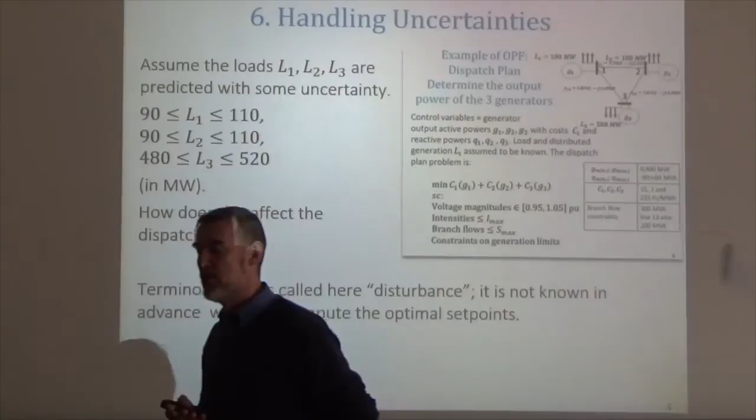For a very, very large grid, for example, the transmission network of France, the uncertainty about the loads is very small because we have a huge system and the laws of large numbers make the individual variations more or less cancel out, and the uncertainty of loads comes from human behavior. So if you're able to forecast that there is a hockey match on Saturday evening, that there is nice weather on Sunday, you can know more or less what people will do. So large companies that run large grids do this using sophisticated machine learning and forecasting techniques, and they forecast the loads with an accuracy for very large countries at the aggregate level of order of 1%.

Of course, if you do that at a smaller scale, if you're doing voltage control on the EPFL campus, for example, which we're not doing because the EPFL grid, like everything at EPFL, is over-dimensioned, so there are no voltage problems. But in other parts of Switzerland, there may be voltage problems if the grid has been built over time by adding new settlements, new buildings, and then trying to extend the grid rather than building a new transformer or pulling new cables. Then you might have voltage problems, and in that case you need to do a forecast at a much smaller time scale, smaller space scale. In that case, you will have uncertainties that may be up to 10–20%.

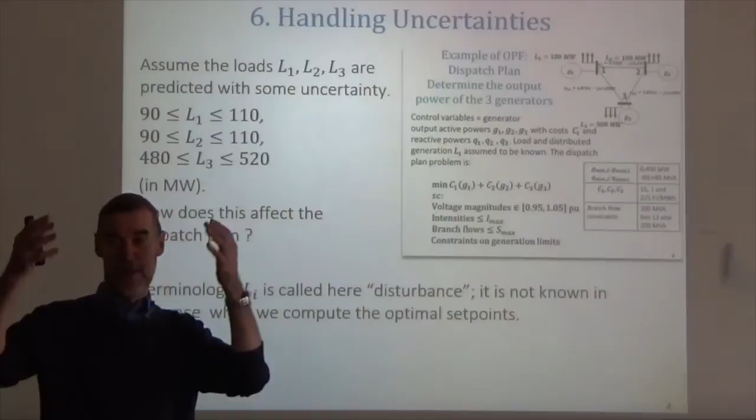From the grid viewpoint, they are not fed to a separate grid that would be called the grid of generators. That's not the way it is. They are just fed to the same transformers. So we speak here of the net load. So the net load is the true load minus the production. And in some cases, the net load might be negative, which means a load might be, in fact, generation. When we add the net loads, then we have much more variability.

Solar PVs in particular are easy to forecast, roughly speaking, if we know the weather forecast. However, they're affected by clouds. So if there are cloudy days, like today, for example, the production can go down by 30 to 60% when clouds pass, and it's very difficult to forecast clouds exactly on a given neighborhood. So to make a long story short, the load forecast accuracy is usually from very accurate to 10-20%.

There might be other reasons for randomness. For example, you might want to do something that assumes that you might have a failure of at least one device. We don't do that on this very small grid, but this is also done in larger grids, where if you have n generators, you might do a plan assuming 1 out of the n generators, or in general k out of the n generators, are in a random state, which is on or off. So you may want to have the system operational, assuming all this uncertainty.

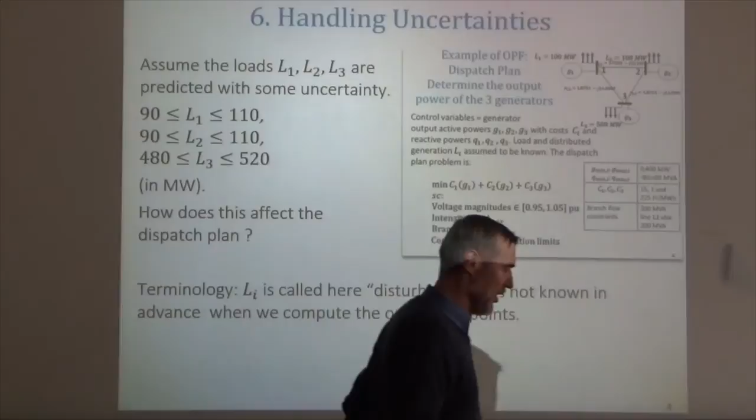Here, what we will discuss more precisely is when we have continuous uncertainty. That means inequalities, like here. How does this affect the dispatch plan? From a control theory viewpoint, we are in front of what is called a stochastic optimization problem, or an optimization problem with uncertainty, or a robust optimization problem. Those are all generic terms that may mean specifically different things. We'll talk about it when we see the specific instances of the problems.

But the terminology that is usually accepted is to say that the random thing is called a disturbance. In other fields of mathematics, we would call it a random variable. Here, it's not always modeled using stochastic frameworks and distributions, sometimes just with inequalities. So we invented a generic term that is called a disturbance.

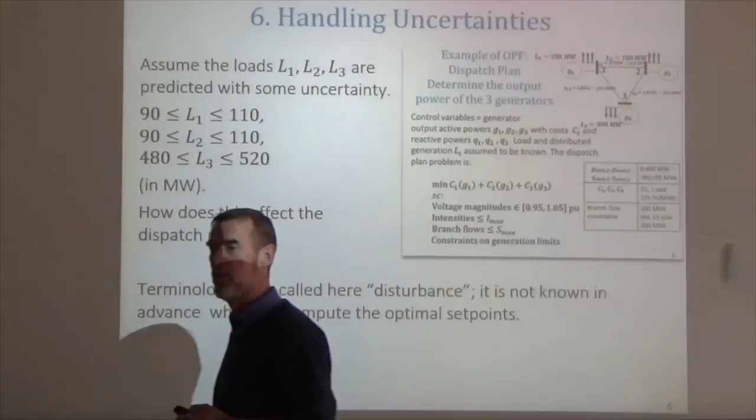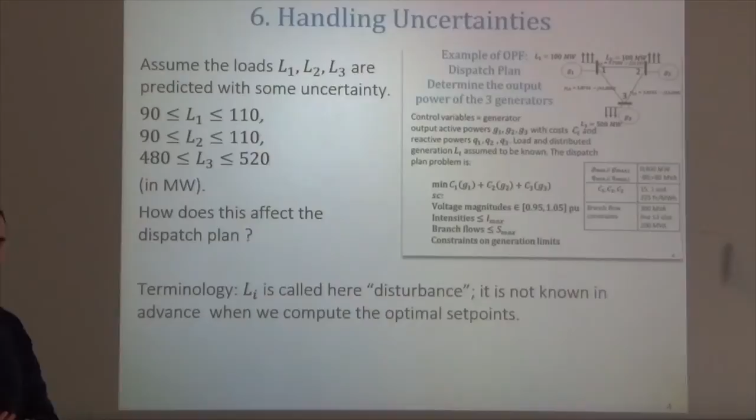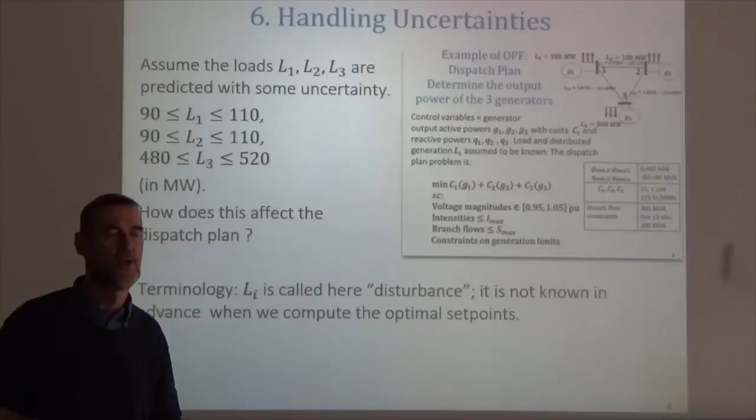So from a control and optimization viewpoint, we're in front of an optimization problem where we have a state. We have a state equation, which is the equations of the grid. We have control. Those are the things we have to decide upon. And there is disturbance. So we can view it also as a game where we are in front of a big machine or a big system. We have to tune some knobs to find the values of some parameters. And then an adversary, nature, randomness of users, will play something called a disturbance. And we have to find control that will work well under all conditions of the disturbance, or practically all.

So if we look in detail at this problem here, we have to choose the set points of the two generators, G2 and G3. As we said, the first one is the slack bus, so there will be instantaneous power balance in the entire system, so G1 will adapt. And let's assume the cost we will pay is the cost of the two generators, G2 and G3. The slack bus also has a cost, we assume. And we'll have to pay for this cost. Now, the new thing is that this cost is unknown in advance. So we have to buy something that we don't know exactly the cost, right? So it's like if you decide to go somewhere with your car, you will have to budget a certain amount of money for the gasoline. You will not know exactly how much you will pay, but you will have to pay for that.

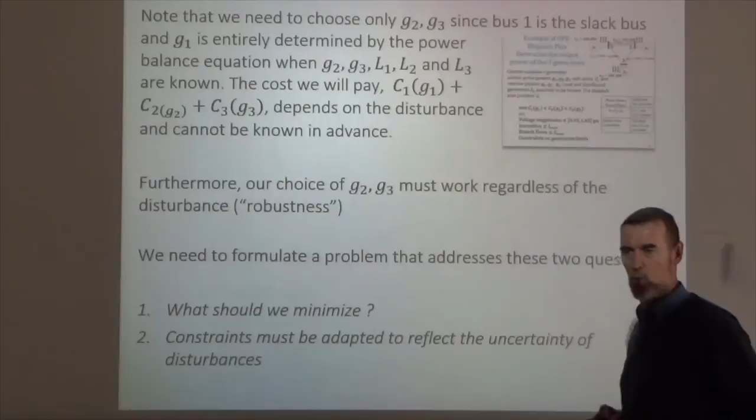Right? Furthermore, the choice of the set points of the control must work for all values of the disturbance. What does that mean? Well, we have limits here, limitations on the power flows that can go on the grid. So I cannot use any fixed value here and hope that it will work in front of all uncertainties. It may be that if the L load here is very variable, we are forced to have a power flow that is very large on this line, and it might make the problem unfeasible. So when we have disturbances that have very large variability, very large range, we will be confronted with this problem. We will see that we must choose set points, control actions, values of the controls that work for all values of the disturbance, and sometimes it may not be possible. So some robust control problem might be infeasible. We'll see some cases of that.

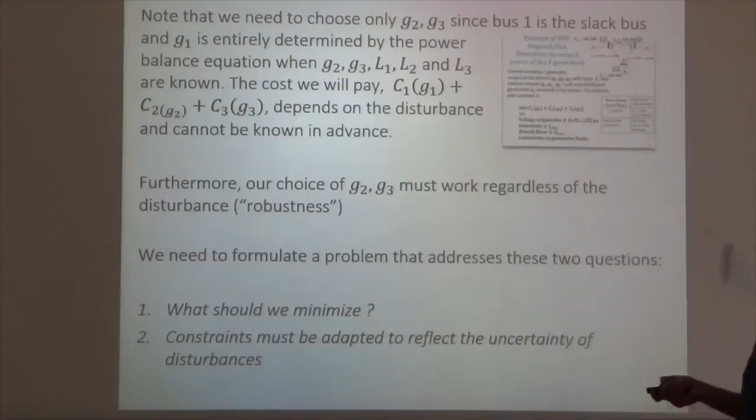So we see here that there's a separation in the variable part of the load that affects two parts of the problem we had formulated. The first part is how do we formulate the cost that we want to minimize, given that the cost is now something that is unknown. And the second thing is how do we formulate the constraints, the fact that the constraints must work in all cases. You will see when we do that in practice that the most difficult part is to adapt the constraints. Finding controls that work for all constraints, that is the part that is the most difficult in practice.

A classical way to formulate such a problem is to cast it as what is called a stochastic optimization problem. Stochastic optimization assumes that the disturbance is drawn as a random variable. So we have to choose some control parameter, I call them generically U. Our U in the case before was G2, G3. Nature, or our adversary, or human beings will choose some disturbance that we assume to be known in a specified set. And the system state is given by the plant equation that we assume we know.

In the case of a grid, we know exactly with the admittance matrix formulation, we know this equation. So the state will be a function of what we have decided and of the disturbance. And one of the major constraints we have is that the state must be feasible regardless of the disturbance, and we will pay a cost that depends on our action and the state here. So that's a fairly generic formulation here.

In the framework of stochastic optimization, for the thing we minimize or optimize, we take the expected cost. Expected cost means we assume that we can say something about the distribution of the disturbance, not only its bounds, but also something about the distribution. If we can say something about it, we can compute the expected value of the cost of u and x when x results from f of u and d. So the random thing now is d.

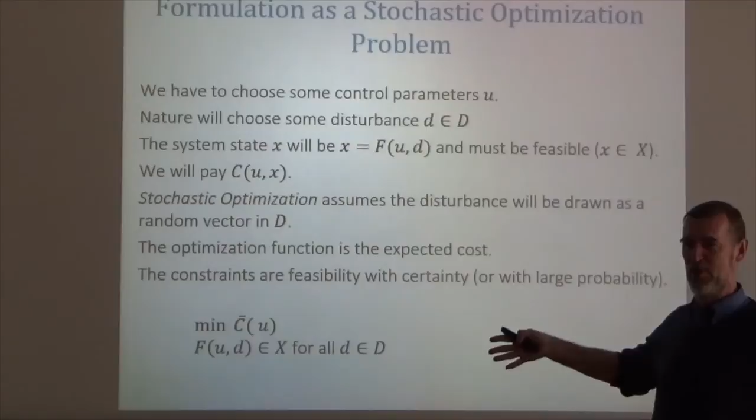So very often, what we try to do is to find a subset of D where with very large probability, 99% for example, the constraint will be satisfied. Which means we accept the fact that with some probability we fail. In a grid, the probability of failure is non-zero and is accepted. We accept as okay behavior if it fails 2 hours per year, which corresponds to a probability of failure that depends on the time scale on which you are operating. If you're doing this for the next day, you should have a probability of failure for the next day such that when we accumulate those probabilities over an entire year, we get maximum 2 hours per year, which is 99.99% over the year. So the probability of failing over a single day must be much, much smaller. This is the most general form of stochastic optimization, where we have also some probability in the constraints here.

So let's apply this framework to our example. I use here the DC approximation to simplify. We can of course do that with any convexification we have of our problem, but there are many technical problems. The more sophisticated the linearization is, the more complicated the equations will be, but the framework is always the same. So I take the simplest framework here. Those are the equations we have of the grid, so the state equation, when we replace the AC equations by the DC approximation.

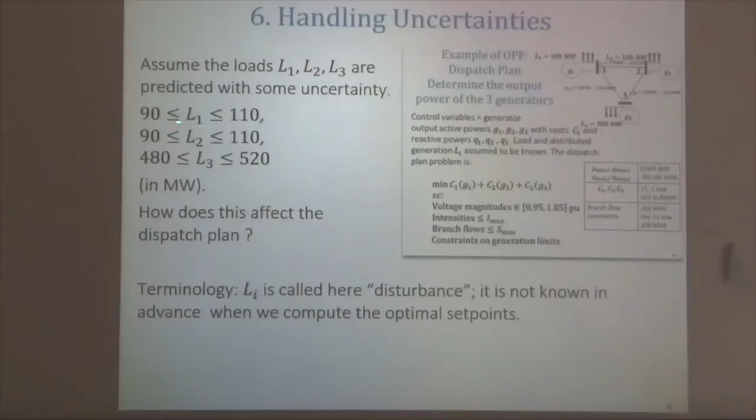Then what we want to minimize is the cost of the set points G1, G2, G3. Here I have separated an equation for the cost of G1. This is the power balance equation with the DC approximation. And here I put a bar over L1, L2, L3 to express that the bar is the expected value of L1, L2, L3. Here I'm assuming that L1, L2, and L3 are between those bounds here. And I'm making some additional assumption. I'm assuming also that the expected value of L1 is the middle, which means it follows some distribution which is symmetric, for example uniform, but any distribution that has the property that the mean is at the center would also be okay. So I assume here L1 bar is 100, for example.

Since the cost here is also linear, the expected value of the cost is the cost of the mean. So the cost of G1 in expected value will be G1 bar. Then G2 and G3 are our control variables, so their expected value with respect to the disturbance is G2 and G3. So this is what the C bar function becomes. Then we have all those equalities for the true and random values.

Those are the grid equations that we had before. When we translate them into the DC approximations, we find those inequalities of the angles that correspond to the power flow limitations on the lines. And we also have the inequalities on the power injections at the different generators. So this is the same as before.

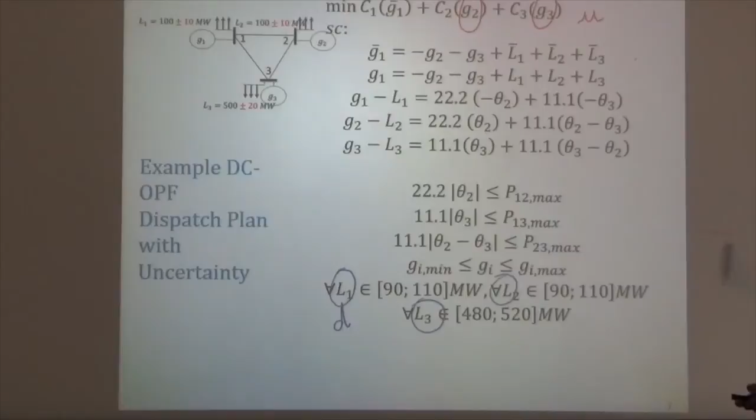And what is new, in addition to the cost, is that here we find the condition that those inequalities must be true, particularly those ones, for any value of the disturbance within the specified bounds. So this quantifier "for all L1" is the new and annoying thing. That's the thing we need to get rid of, and we'll see techniques to do this. Okay, this I have explained already.

So the next step to solve this optimization problem is to make it appear in the framework I gave before, where we have only a control and a disturbance. So I need to remove the state from the equations. If you remember the formalism, we have a state equation, which is x as a function of the control and the disturbance. And at the end, we want to say that the control is feasible for any value of the disturbance.

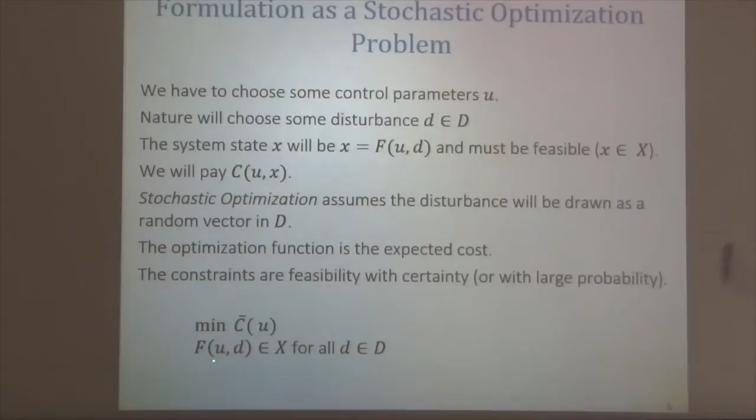So this is a constraint on U only, on the control. There's the letter D, but since it is for all D, the result is a property of U. So here I have eliminated X. That's what we will now do for this example. So the X is the theta here. Theta and G1. G2, G3 are the control. G1 is the state that results from the control and the load. Those are given by those equations here.

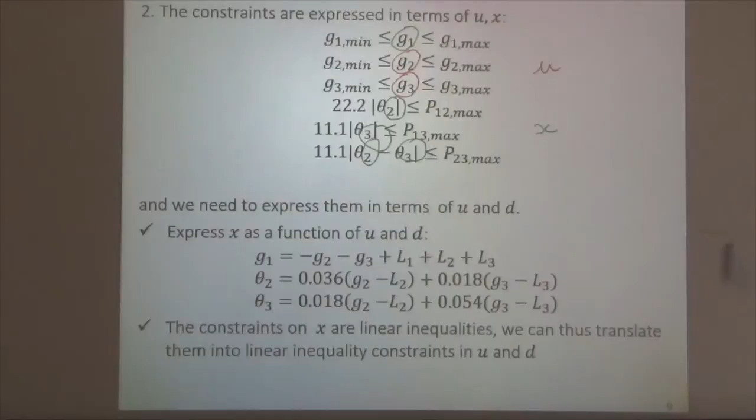So if I play G2 and G3, and if nature plays L1, L2, L3, we have from the DC approximation equalities, I can reconstruct G1, theta 2, and theta 3. Since those are all linear, of course, we've linearized everything, they're all linear in the control and in the disturbance, then the inequalities I have here can be translated into linear inequalities in the disturbance and the control. And if we do this, this is what we find. We find the control G2, G3, and the disturbance. And when we eliminate all the thetas and G1, we find those 4 lines of inequalities. That gives 8 inequalities here, plus those 4 inequalities on the controls G2, G3. So those are the constraints of the problem.

So if we go back, of course, if we look at this, we are too close to the details. We need to abstract it a bit to solve it. So if I abstract it, I see that I have a problem of the kind: minimize some function of the control u, because I've taken the expected value. C bar happens to be linear, but here the focus is not so much on whether it's linear or not. Subject to constraints. Now the constraints are all linear inequalities. We have, for example, here, G2, G3, L1, L2, L3 less than something, so that is one inequality, and another one, so I have 2 inequalities here that are linear in the control G2, G3, and the disturbance here.

So in general, I can write capital J linear inequalities that have the generic form for a linear inequality. It's linear in U and D, so I call A and B the coefficients that are in front of U and D. So the index J is for the jth line of inequalities, and the transpose is because this is a line of coefficients here. So each of those corresponds to all of those inequalities, and they have to be true for all values of the disturbances that are themselves defined by inequalities. So the disturbance is L, so those are the constraints on the disturbances, and we have here how many inequalities for the disturbances?

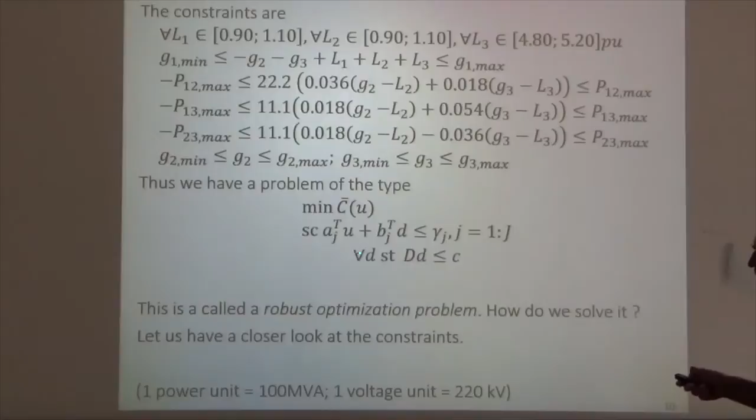It's called robust because there is the for all D here. So the robust means the disturbance is assumed to take values specified by some bounds. So the problem now that we will solve is how to solve it generically, once for all the problems of this type here. So we have a problem where we minimize a function of the control, where the control and the disturbance are subject to linear inequalities that are fairly simple here. The linear inequalities separate the control and the disturbance. And the disturbance themselves are also subject to linear inequalities here. So the problem is how to get rid, we will see that it's possible to get rid of the disturbance, which is annoying because of the for all sign here.

And the key step is to understand how to do it formally, in particular, how to get rid of the for all step here. Here I'm proposing 2 methods. I'd like to ask you to tell me which one you think is correct, if any. And the majority says C, which is correct.

But the important thing is, in fact, to understand the method that leads to this conclusion, because that's the method that we use in general for all robust optimization problem of this specific form. The key argument is that we had something that says this is less than a number, this inequality is true for all value of the parameter D1 that itself satisfies a constraint. Then the key step here is to say that this is equivalent to saying that it's less than the minimum. So saying that an expression is less than a function of d1 for all value of d1 is the same as saying that the expression is less than the minimum. Strictly speaking, it's the infimum, but here we will not do the distinction between the two.

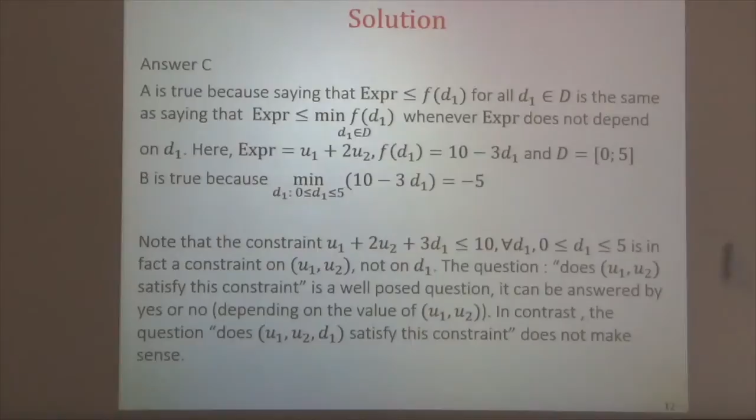Then the second step simply is true because now we have an optimization problem to solve, an auxiliary optimization problem. And this one is easy to solve because it's single dimensional. Anything single dimensional is usually simple. The minimum of this, that's a decreasing function of d1. So the minimum is obtained when d1 is larger, which is 5, and that gives minus 5 here. So the minimum of this is minus 5. Therefore, this is the same as minus 5. A and B, in fact, are the same. And A is equivalent to the original problem, so both are equivalent.

Well, if you're able to solve it for this example, then that's exactly what we will do in the generic case for this type of problem. So I rewrite here the problem we had to solve with those inequalities. We have not one inequality like in the quiz, but a number of them. Then what I will do is, for each of those inequalities, I will separate the control and the disturbance.

So I will say that it's the same as A_j u less than gamma minus b d. And then I have to take the minimum of the right-hand side minus b d plus gamma for all values of d. This is now a linear program. It's an optimization problem where everything is linear. So that's a linear program that we can solve. There is one such program per constraint here.

So I have to solve a large number of linear programs, but solving linear programs is a routine thing for MATLAB or for many solvers. Let me call H_j the optimal value of this problem. It has only one optimization variable, that is d, and it does not depend on u. So I can call H_j the optimal value, which is a constant if the coefficients here are constants, which we assume. Therefore, the jth constraint is equivalent to a linear constraint on u with a right-hand side that we have computed by solving this auxiliary problem.

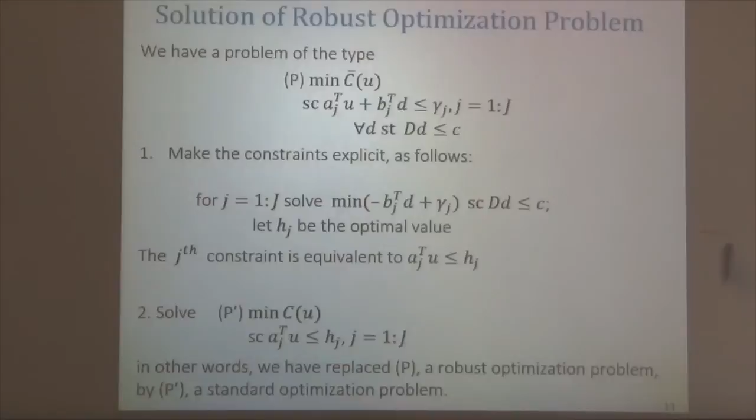Return to our example and see what happens. We had all these inequalities that we have now put in numerical form, and we had inequalities that depended on d, which was L in our previous example here. So I had these 1, 2, 3, 4, 5, 6 inequalities. So I solved 6 linear optimization problems that are not very difficult because the constraints on L1, L2, L3 are rectangular constraints. And that gives me those 6 constraints here where now there is no disturbance. L1, L2, L3 have disappeared. Of course, I've done that with MATLAB. Doing that manually is doable for a few people, but most people need a computer. So this is what we obtained.

Those are the robust constraints we had at the beginning that were not robust. So by doing that, we've seen that we needed to work on the constraints. It's done. And I obtain this thing. Now if I change the bounds, so this was with those bounds that are written in red, 100 plus or minus 10, I will change the optimization problem that I had in every inequality. I will change the set over which the L varies. I'm computing a max or a min over all the possible values of the disturbance. If I change the bound, of course, the constraint will change. This is what I obtain if I add the uncertainty, assuming the first load here has an inaccuracy of 50% instead of 10%, and the last one an inaccuracy of 20% here. Those are what the constraints become. Of course, the coefficients remain the same everywhere. It's the right-hand side that varies here. Sorry, I said 6 a minute ago, there are 8 inequalities here.

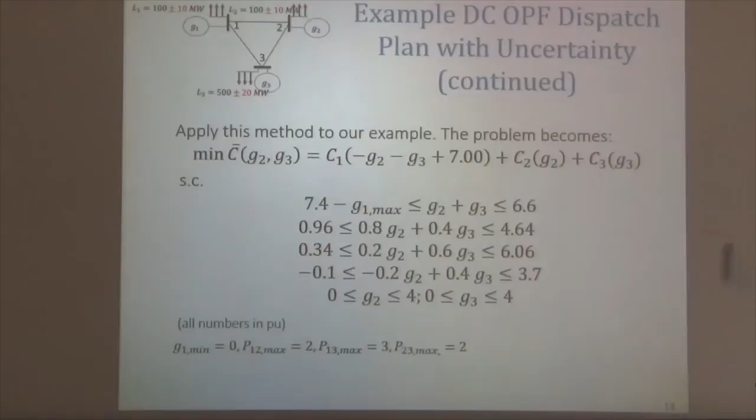Now, if we observe those inequalities, what can we say about them? That's a problem that's easy to solve because, if you look at the first line, it's clearly infeasible, right? The left-hand side is larger than the right-hand side. So there is no solution to that problem. That's an optimization problem where the set X of the constraints is empty. There is no feasible point. Which was not the case when we had that level of uncertainty, right? We had, depending on G1 max, some correct values here.

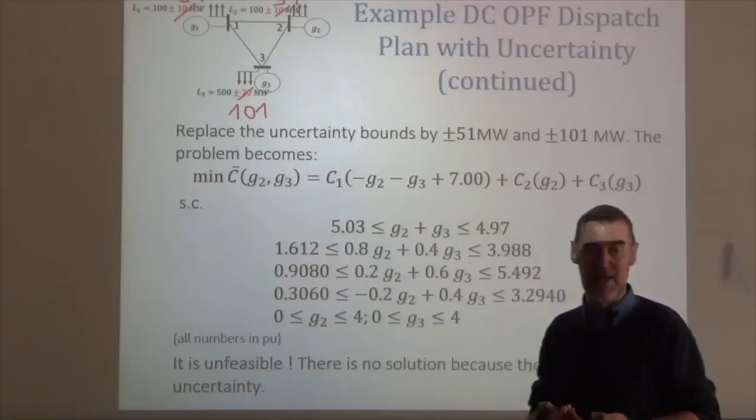So the first observation: when we have a robust optimization problem, we will discover the exact bounds by solving optimization problems to remove the d, and then we will see a posteriori, not a priori, whether the problem is feasible. And it may be that the problem is infeasible. In that case, it's impossible. In fact, the problem is with G1. It's impossible to find a set point of G1 that will satisfy all the constraints in this range here. There is too much uncertainty. It's infeasible. So if you are running Swissgrid or RTE in France and you find such a thing, then you need to know it in advance, and then you'll need to fix the problem somehow. Fixing the problem by changing the generator set point, curtailing the load or doing something, or refining your forecast, but you will need to do something. This problem is infeasible.

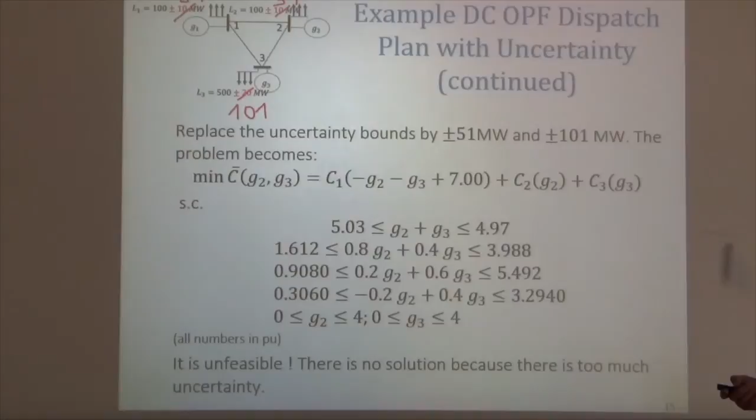If we go back to the previous example also, we saw that when the uncertainty on L3 came to 100, the problem was infeasible. So in fact, if I would continue this curve here, we see that at 100 we have this cost, and then when we go beyond 100, the cost becomes infinite. It's impossible to run this grid. So here, in fact, 100 is the maximum uncertainty we can sustain. So infeasibility, we can view it as a special case of having very large cost.

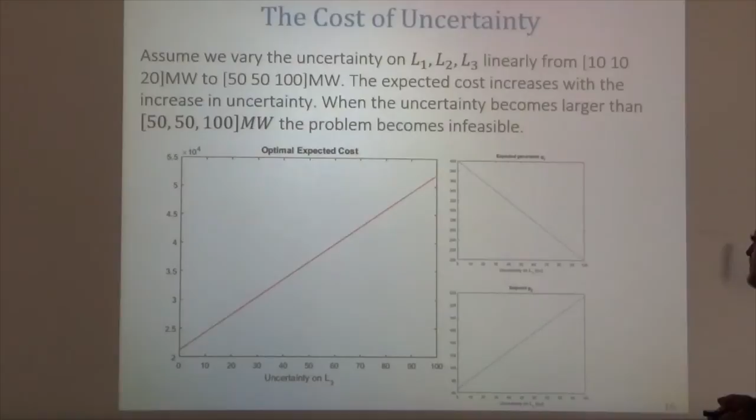Here we have seen a simple form of stochastic optimization where I assumed that we can have the constraints satisfied with certainty. Very often people make other modeling assumptions. They assume that the unknown loads satisfy some distribution that is typically derived from a Gaussian. Not always. Some people also use a beta distribution or Weibull, but let's do it with Gaussian here.

So instead of saying the load will be, in the worst case, plus or minus 10%, I say, well, I don't know exactly, but it will be Gaussian with a mean, which is my forecast, and V_i, which is the variance of my forecast error, my a priori variance. Now, what's the difference? If I do this,

we very often use Gaussian distribution. By doing that, we very often ignore the fact that the Gaussian distribution is unbounded. If I say tomorrow the load will be 10 with a standard deviation of 1, that does not exclude the fact that the load will be plus 1 million or even minus 1 million, because the Gaussian distribution has support on the whole set of real numbers.

But this is a bit academic, because the probability that a Gaussian variable is larger than 6 sigma, for example, is less than 10 to the minus 4 or 5. So the probabilities of seeing values that are above a number of sigmas are astronomically small, but they are non-zero. So if we want to do it mathematically, we are forced to accept that some constraints are violated with some probability. That we will see in a minute.

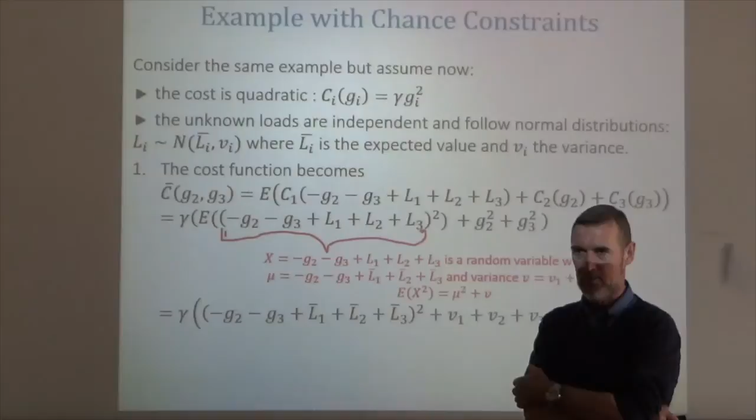We are studying the case where the problem to solve is assuming the disturbance follows a Gaussian distribution. We have seen that this affects the cost. Let's see how it affects the constraints. As we discussed a few minutes ago, we cannot now put deterministic bounds because the support of the distribution is infinite. But we can say that some inequalities have to be true with some probability.

Then it's fairly straightforward, apart from a small subtlety here. We want to say, for example, that those three inequalities, we want to replace the generic problem by one where those three inequalities are true. In other words, we believe they are true most of the time. But exactly what it means is with probability 1 minus epsilon, where epsilon is very small, for example 10 to the minus 4. So with probability 99.99, these three inequalities are true, right?

Now, which values of the alpha should we choose? Well, because we have three inequalities, saying those three inequalities are true means each of the three must be true. In particular, if any of the three are violated, then the overall inequality is violated. So we find that we have to set the probability with which each of those inequalities is true to a value larger than the final value. They are mathematically related by this relationship here. If we want that, with this epsilon, the three inequalities are true, then we must make sure that each individual inequality is true with a larger probability. The probability of failing it is even smaller here. Approximately, if epsilon is very small, epsilon is equal to 3 alpha. The probability of violation of each must be 3 times smaller than the total probability of violation.

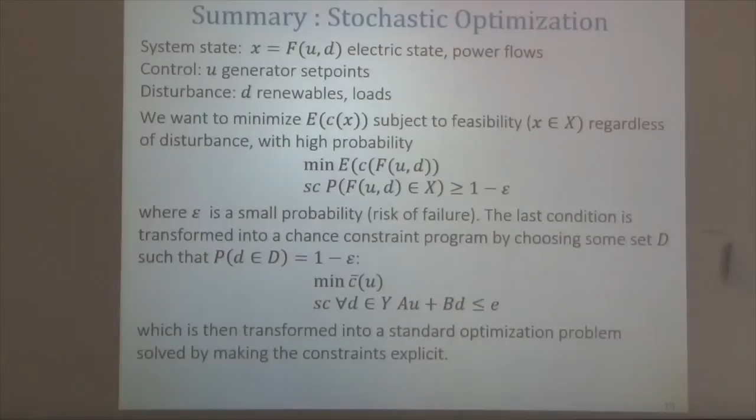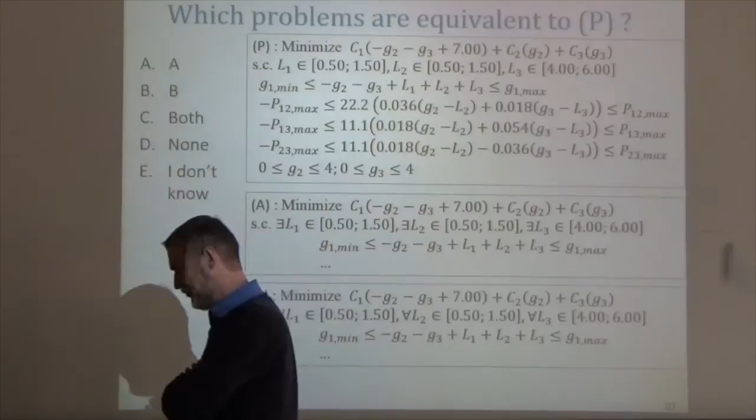Before we move to the next case, I'd like to ask you the following question, which is often asked and puts the finger on one of the things we have to do when we model grids, or in general when we do stochastic optimization for processes. But again, that's the bread and butter in smart grid. If you read the transactions on smart grid papers, at least more than 50% of them start with an optimization problem. So the stochastic optimization problem is really the bread and butter.

Now the difficulty in a stochastic optimization problem is the transformation of the problem. Because if the problem is not convex, probably for realistic cases you will not be able to solve it, so you will have to make it a convex problem by some trick, which may be difficult for the AC equations. But once you have done that, the difficulty is, like in the lab, to transform the problem to make it fit into one of the boxes that we can solve. Here is an example. I'm showing you an original problem, which is this one. You will see it's a bit different from the one we had before, because there's no quantifier. And I'm asking you which of the two problems, if any, is equivalent to this one. The majority says B, which is the correct answer.

The first problem is saying, well, we have an objective function that contains only the G variables, but there are other variables, the L, that are present in the constraints here. So that's a very frequent case. Very often we see optimization problems that are posed with a number of variables of interest that appear in the cost, for example, plus zillions of state variables or intermediate variables that appear in the constraints here. So that's a very standard problem.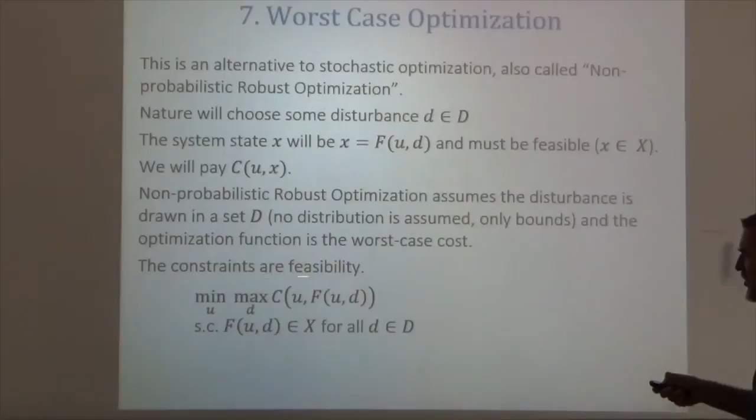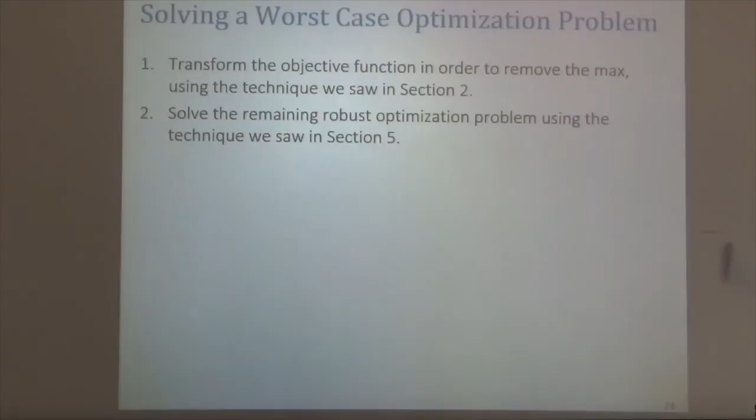That gives a problem of this kind. Minimize over the control u, the max over d of the cost of u, f of u, and d. That must be true also for all d in D. So the constraints are not modified, but the objective function is modified here. We have seen last week how to transform a problem that has a max in the objective function. Then we will apply this technique, and what we will see is that in fact we can replace it by a problem that is exactly of the same kind as we had before.

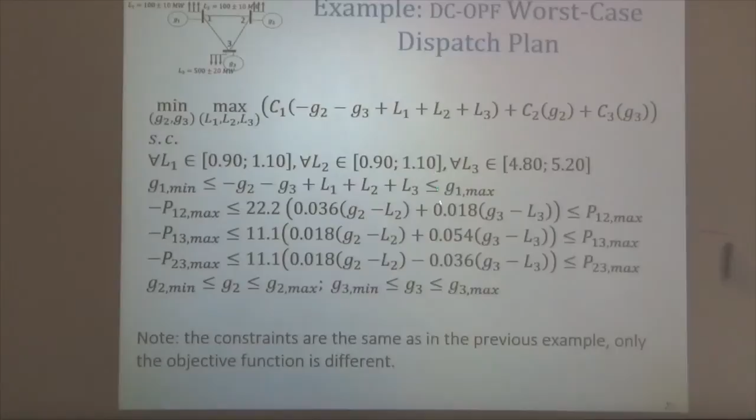So let me take this for the same problem. Now I want to minimize the cost, which is the cost that is written here, but instead of taking the average cost, I take the worst case. So now it's the max over L1, L2, L3, where L1, L2, L3 must satisfy this. And in addition, we also have the constraint for all L1, L2, L3 in the feasibility conditions here. So we have a problem of the kind min max C(u,d), where the max is over all d that satisfies the constraint, and the constraint also has this quantifier.

The technique we have seen last week consists in saying if I have a max of things, it's equivalent to the problem I have by adding a variable which represents the max here. Note that this is not a minimization problem over u and d. It's a minimization problem over u alone, but where the objective function is itself the result of another auxiliary optimization problem. So what I do is remove this max, with the technique we have seen last week. We call epsilon the max, and epsilon becomes a supplementary optimization variable. And we require that epsilon is larger than C of u and d here.

So we see that now we have an inequality constraint with epsilon that depends on u and d, where d is our disturbance. Now, if the cost is linear in u and d, that will give simply more variables and more inequalities. We have u, the control, but also epsilon. And at least in the case where the cost is linear or can be made linear, this will be a problem that has exactly the same form as what we have seen last hour. So it can be solved with the same techniques here.

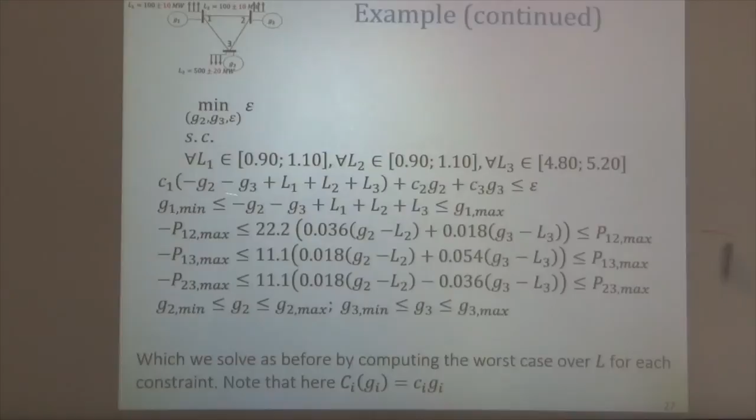So in the case of the linear cost, this is a minimum addition here. This will give this. So epsilon is larger than this. This is the cost function here. And this epsilon must be larger than this for all L1, L2, L3. Then we need to compute the worst case of the left-hand side here. So we put that on the other part. We have to solve an optimization problem for this. And that will give, for example, for the specific values of the uncertainties, this problem here. So, of course, the cost that we find here will depend on the uncertainty bounds for the disturbance. Voila. Other than that, this is business as usual.

A third case, which is not business as usual, is when we introduce some feedback. In fact, when we have stochastic optimization, we will often find cases where the problem becomes infeasible if we have realistic disturbances. This is because we are saying, I want to find a set point of my plant, of my grid, that will work for all values of the disturbances, of all the loads and the PV production, and I have to decide today something that works for all cases. So very often that forces you to have largely over-dimensioned systems. If you can adapt to the change in the disturbances, then of course you can live with something more economical.

For example, in a grid, if I have this grid here and I say if the loads are a bit more than what was forecast, there are controls, real-time controls that will occur. The first form of real-time control is called primary control, which I'm sure you've heard of. So what is primary control in an electrical grid? Stabilizing the frequency? Stabilizing the frequency, exactly. So it's also called frequency control.

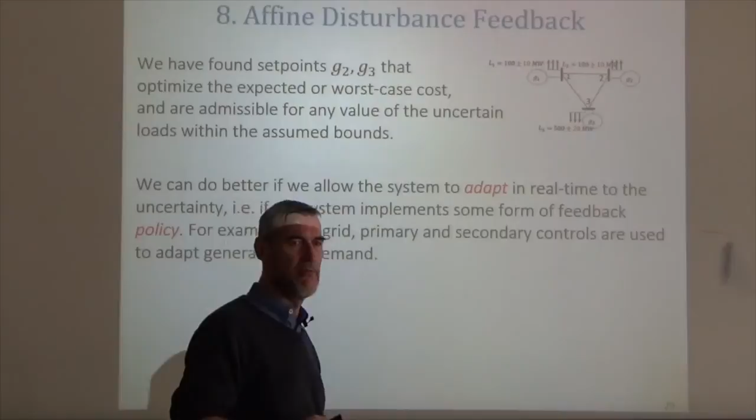When the frequency decreases, we have not enough power in the grid, so we know, because you can directly measure that, that we have to increase the power. So when the frequency decreases, we have power imbalance. We have not enough production. But why is the frequency a symptom of the power imbalance? Because the difference in energy gets stocked or taken in the rotational energy of the rotor of the generators. So if you have an imbalance, you either increase or decrease the rotational frequency.

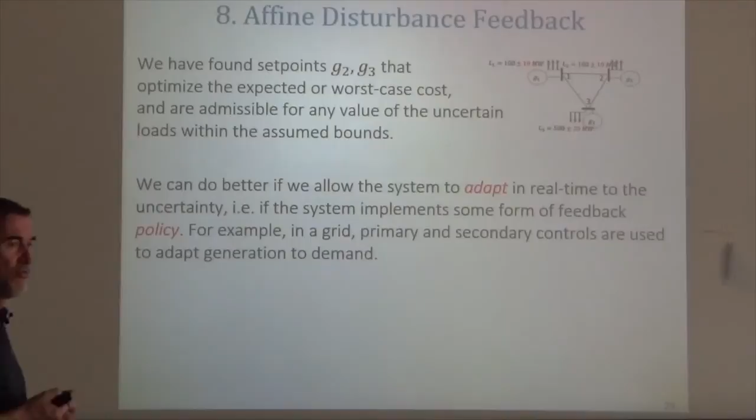Exactly, because we have rotating masses that are generating electricity. And if you pull more than the rotating masses are expected to produce, what do they do? They slow down. It's like on your bicycle, when you start a slope, then it's more difficult and you slow down, right? So the slowing down reduces the frequency if we have synchronous generators. So this term frequency control comes from the legacy grids that are fed by synchronous generators, the turbines of the nuclear power plants, for example, or the big gas generators are of that type.

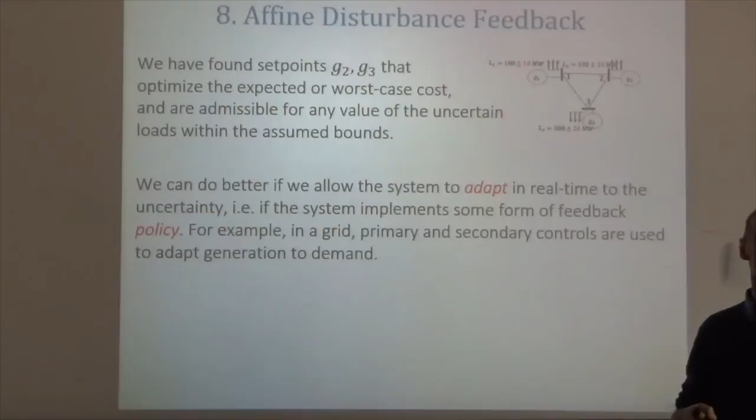In the future, if we have a microgrid that is operated only by batteries and solar panels, for example, that go through inverters, there is no rotating mass. Even if you have wind energy, the rotating masses are interfaced to the grid by DC-AC conversion. So there is no longer this dependency from the frequency to the power imbalance, which is one of the challenges in the smart grid: to be able to detect the power imbalance without the symptom of frequency.

In the extreme case, if you have a grid that has no rotating mass at all, the frequency will be constant. If your slack bus is given by a battery, the battery will give a frequency, and physically the frequency is completely synthetic. So what people have proposed to do is to emulate the inertia of rotating masses by measuring the power imbalance in the grid, and when there is a power imbalance, vary the frequency, but that becomes artificial.

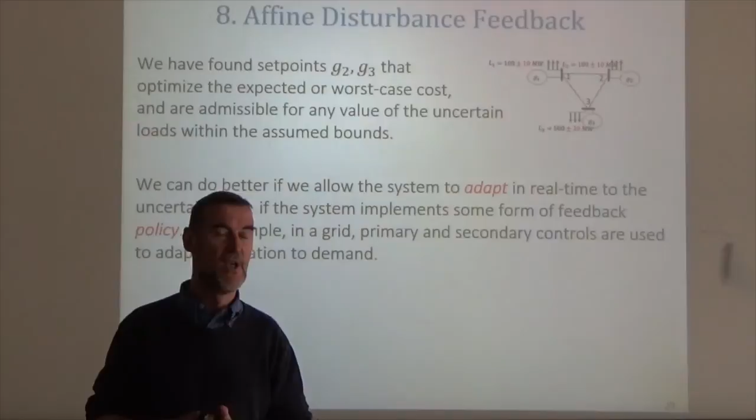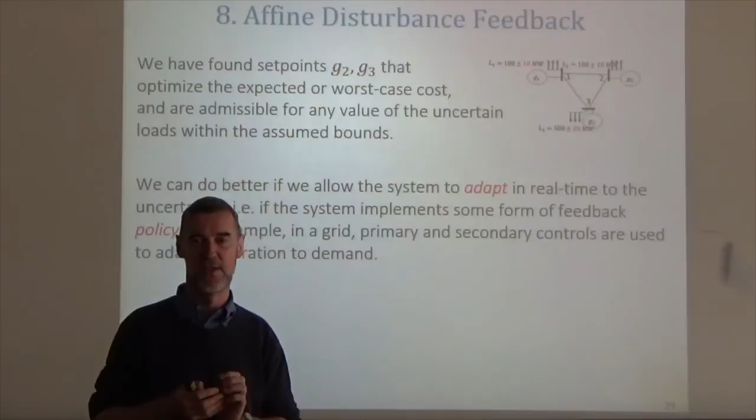The problem is that in grids of the future, or even now on some days, we're approaching those days in the spring where there will be a lot of sunshine and a lot of wind, there might be a majority of generators that are non-rotating masses, non-synchronized rotating masses. So they will not respond in frequency. So even though we still have those big rotating masses, the frequency signal is becoming less significant. So that's one of the problems, and those problems are solved typically by having more advanced controllers.

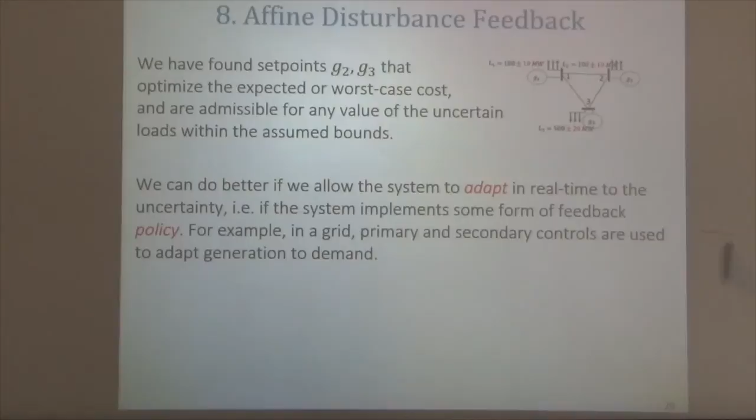So what those controllers are doing, either directly in the case of frequency or indirectly, if we have more advanced controllers, is that they are able to sense the power imbalance, for example, by having PMUs that measure the power flow everywhere. Then if you have a control that senses the power imbalance, it will instruct some of the generators to send more or less power. In traditional generators, this is the governor of the turbine that will implement what is called droop control, a linear feedback law that will increase or reduce the power generation of a generator as a function of the power imbalance.

So let's redo our exercise here, assuming we have G2 that follows this. In practice, the grid code today says if you have synchronous generators in a grid, you should do it everywhere. But here, let's assume only G2 does it.

That means that the value of the power that is output by G2 is not a fixed constant like we had before. Before, we decided day ahead what G2 has to do, and we set it. Instead, what we decide is the parameters of the droop control. So the nominal set point, which I call U2, you generate this, plus you generate something that depends linearly on the power imbalance, that is effectively measured at some point in time.

Now, I said U2 is the power set point. It's not exactly. L1, L2, L3 are disturbances that can vary around the central value, L1 bar, plus or minus 10%, for example. So V2 times the central value plus U2 is the nominal set point. I'm instructing generator 2 to do this. But I am assuming now that in reality it will adapt. So if the true value is not L1 bar but L1, it will do V2 L1 bar, which is part of the fixed set point, plus V2 (L1 minus L1 bar), which is the zero mean disturbance, the shifted disturbance. And V2 is the slope of the droop at the generator here.

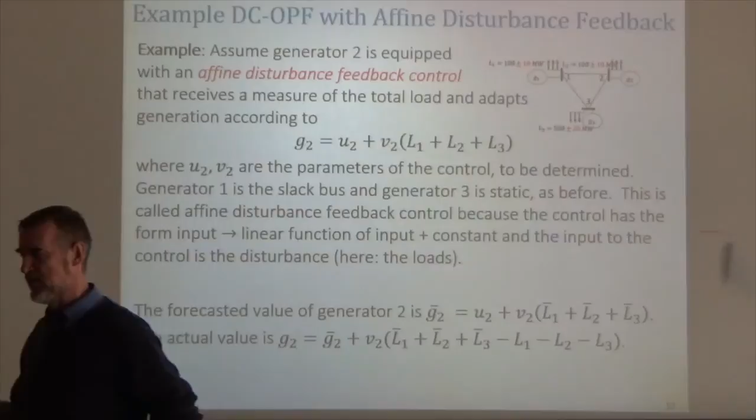From a control theory viewpoint, this is called a disturbance feedback. So the control depends on the fixed values and something that depends on the disturbance here. What we would like ideally is to do state feedback. We would like to have the state of the grid and then adapt to it, but mathematically it's very difficult to solve problems where we have state feedback. It's possible, but those techniques are a bit clumsy very often. Instead, what works very well, as we will see, is to take disturbance feedback. So this is a very generic form of control that is applied practically everywhere in all kinds of plants, and we will see how to solve them practically.

We are still able to do some forecasts. So the nominal set point, as I said before, G2 bar is U2 plus V2 times (L1 bar, L2 bar, L3 bar). So the bar values of the L are supposed to be known in advance. That's my forecast, for example. My control decision now is U2 and V2, from which I will deduce an average set point G2 bar. And the actual value is written in this form. So an equivalent way to parameterize the problem, you find this way or that way, depending on the papers. Instead of saying that I have to decide on U2 and V2, I could say that I have to decide on G2 bar and V2, which are equivalent. There's a one-to-one mapping when we know the L bar between those two formulations.

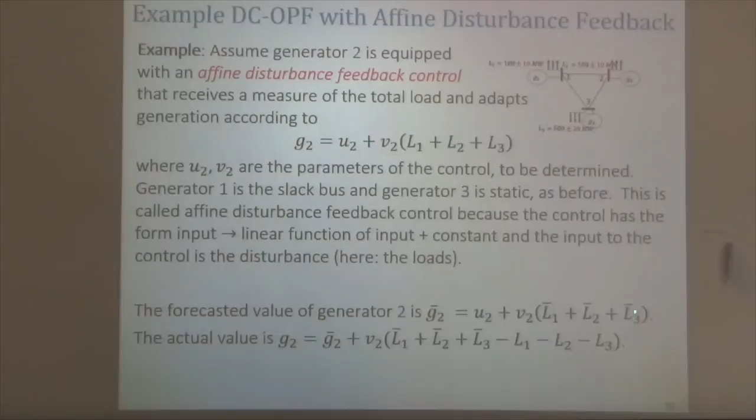So let's do it now in detail. We have now to decide on the two parameters of my generator G2. I assume G3 is like before, a static, not dynamic generator. The disturbance is the same as before, and the state is the same as before. I can compute the expected cost easily if I assume everything is linear. Then it will be given by the expected cost. So G3 is fixed. G2 bar is also fixed. So the 700 comes from the sum of the L bars here. And the cost G1 depends also on my control. Now this is the G2. This is the G2 that we have here.

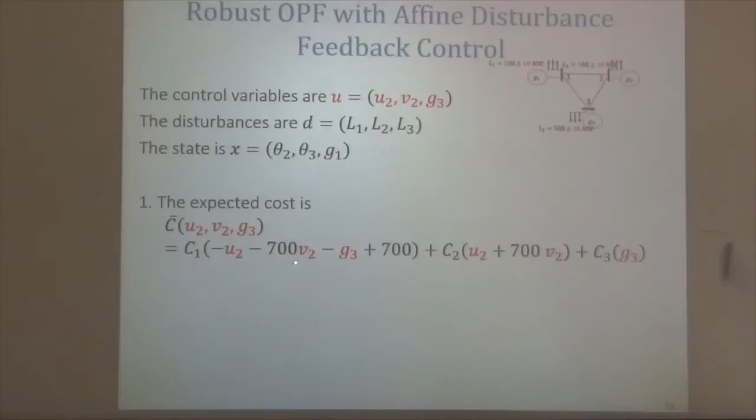That's good. The control is only appearing in the cost, as expected. But where the constraints are for all values of the disturbance, we may have some constraints on the control also. But the constraints that mix the control and the disturbance have a term that is linear in the disturbance and linear in the control, but is not separated.

So one way to write it is to say that for every constraint J, I have a matrix B such that I have a product on the left by D and on the right by U. That's a way of writing something that's linear both in D and U, so it's bilinear if you want. But it's not separated. Before we had a separated thing. So the problem is now how to solve a problem of this kind. It's also a robust optimization problem.

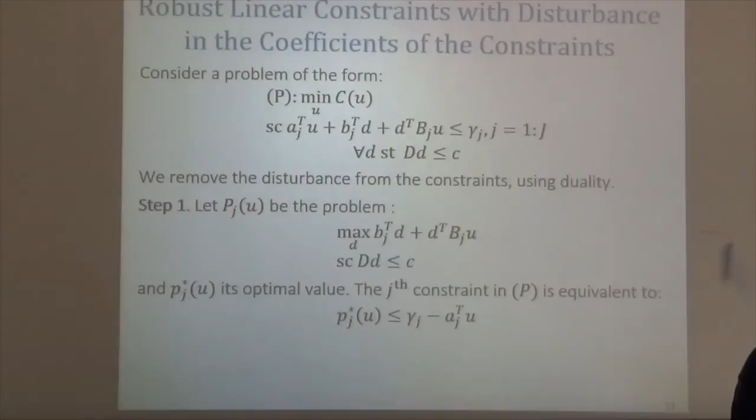Instead, what we will do is consider the dual of this linear program. So what is this linear program? That's the program that is written here. That's a linear optimization program with respect to the variable D with linear inequality constraints. So we have done last week this exercise of transforming a linear program into its dual. And I've just said that it's a completely automatic and stupid thing once you understand the notation. Once you have the good reference, which is this one, and once you write it in the standard form, we find, so I'm redoing exactly what we did on the board last week. If I have a program of the kind maximize AD subject to DD less than C, it is the same as minimize C transpose lambda, such that lambda larger than 0, D transpose lambda equal A.

So we see that the C which was in the constraint has become the coefficient, and the A that was in the coefficient has become the constraint. Now there are always subtle things like why do we have this lambda larger than 0? Why not? Well, those are the typically annoying things in optimization, and to avoid them, the method I propose,

at least when I tested it, it always worked for me, is to always come back to a single problem, which is Boyd and Vandenberghe's formulation. And then this formulation will give you all the necessary elements you have. So we have a completely mechanical way of transforming this into that, which I will now apply to my problem.

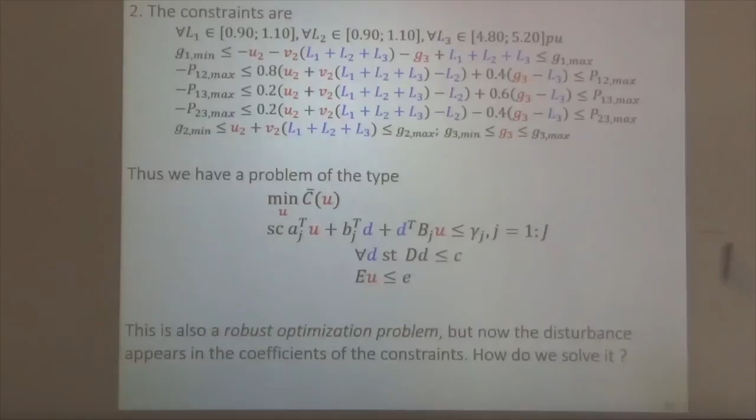So the dual of this problem that we had before can be cast into a minimization problem with inequality, with non-negative Lagrange multiplier and an equality constraint here that are exactly the ones we obtained here. And we know by strong duality, because everything is linear here, that the optimal value of this one is the same as Pj star of u. Therefore, the condition, that's the theoretical solution we would have to remove the disturbance, Pj star of u less than gamma minus au, is equivalent to, because Pj star is a min, right?

So saying that the min is less than something is equivalent to saying there is one value of the objective function that is less than this something here. Again, it's the same transformation we've done many times: if a min is less than something, it means at least one of the values was less than this something. If a max is less than something, it means all the values are less. If the min is less, it means there exists. So we see that max and min can always be used to remove there exists or for all. Now, which one we use depends on the case.

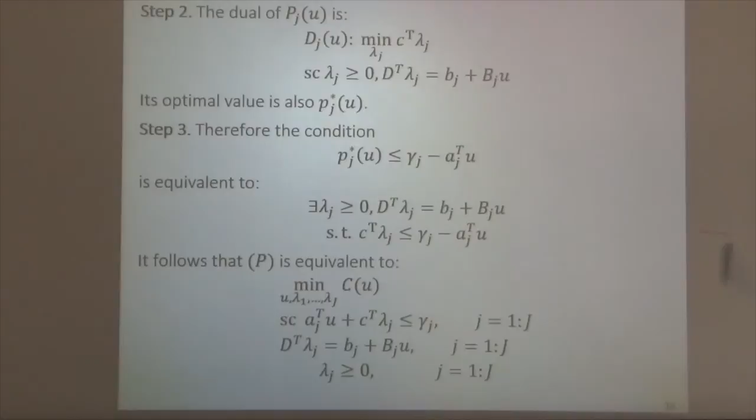So this constraint, we can feed them back into the problem, and therefore our original problem is equivalent to the same cost function, but now we have added one Lagrange multiplier per inequality constraint, and we have changed the inequality constraints that had the disturbance by one that has the Lagrange multiplier. But now there is no quantifier at all, so we have a standard optimization problem. At a cost, we have added one Lagrange multiplier that has the same dimension as the C, the right-hand side of the constraints, per constraint here.

So, in summary, whenever we have a problem of this kind, so that's a quite generic result, any robust optimization problem where the disturbance and the control appear linearly but jointly can be replaced by a problem where I add one vector of Lagrange multiplier per constraint with same dimension as C, the C that is here, and where I replace the quantity here, everything that is in blue, by C transpose lambda j. So this value here that was depending on u now does not depend on u and does not depend on the disturbance. With additional constraints on the Lagrange multiplier that are derived from the different elements of the problem. And if there are other constraints on the controls that were independent of D, of course, they remain here. So we have gotten rid of this problem. At some expense, we have largely increased the dimension of the problem, but we have removed the original difficulty here. Well, that's the major step.

This is how we solve those robust optimization problems that have this additional difficulty here. Well, that's a recap of what I just explained. I did it for this example. I will not write all the details. I mean, this is just MATLAB programming, so you just need to find the way how to write in MATLAB those constraints, which is now the most difficult part of this.

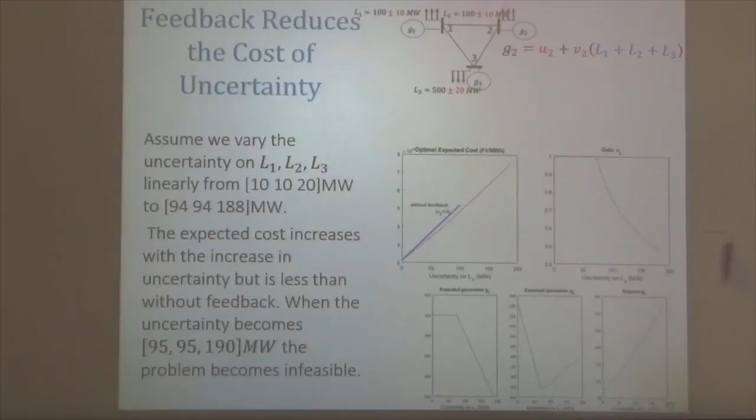1, 2, 3, 4, 5. 1, 2, 3, 4, 5 here. 1, 2, 3, 4, 5. 10 here. So those are all the things where we have blue and red, and there are 10 of them. What's the dimension of the matrix D? Well, the correct answer is the circled one. Is C.

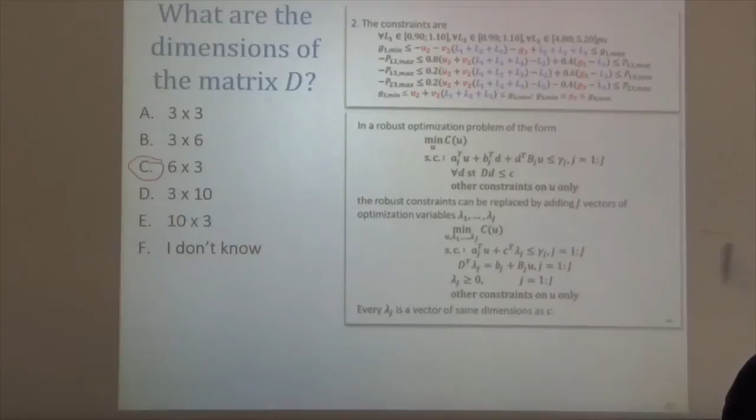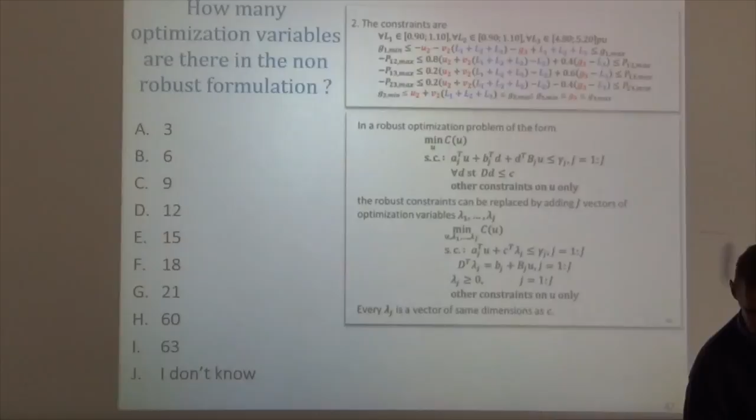Well, that shows where the difficulty is in applying this. It's about screening exactly the things. The disturbance has dimension 3, so it has 3 columns, and there are 6 inequalities. Therefore, it has 6 lines. I will skip the next poll, but I will give just the answer, because we're running out of time. Then we will find that in total we have 10 constraints. The dimension of every lambda j is 6, the number of inequalities. Therefore, we're adding 60 variables to the original problem. So we had a problem with a control of dimension 3, and we add 60 variables.

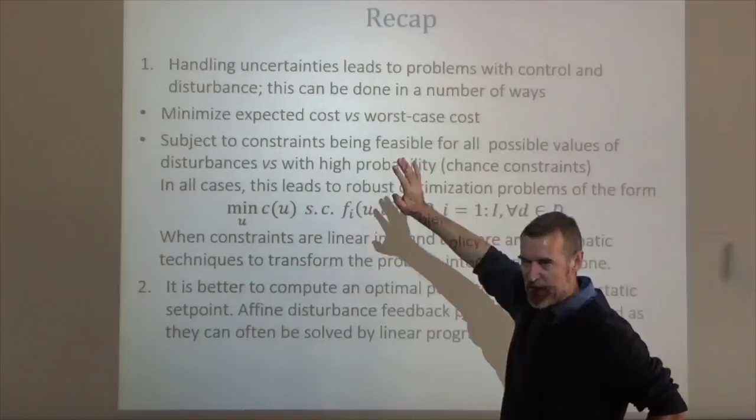So there is a cost to that form of robust optimization. This cost is bearable if the problem is a linear program. This is why there's a lot of incentive in making everything linear. And if it becomes linear, then it is completely tractable. I will recap on saying what we have seen here. So we have seen a number of tricks, which are the standard ones used in the smart grid to solve the kind of problems we're confronted with, where we have both control and disturbance. And I've mentioned also the fact that whenever you can, it's always better to compute an optimal policy than an optimal set point, because an optimal policy will give you more flexibility.

And we've illustrated here that our optimal affine disturbance feedback policy doubles the area of uncertainty. So the policy means the dependency from the state or from the disturbance and the control to the set point here. So from a state to an action, this is called a policy. What we have seen is linear things. We call them affine, there's plus a constant. There's a general theory of abstract policies, but when things are not linear, very often they are very difficult to handle. So those are the things that are most often used in the context of the smart grid.